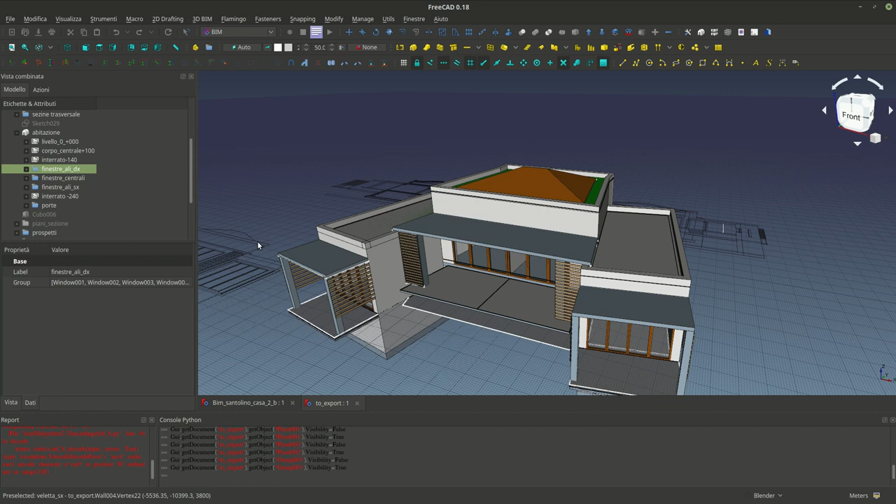To export the model, I have to choose the format in which I want to export. First of all, before the exporting process, I suggest to organize the model in some subcategories. So I have already put the building on 3 levels, 3 layers, and I can activate and deactivate these levels to confirm that the walls and other elements are part of them.

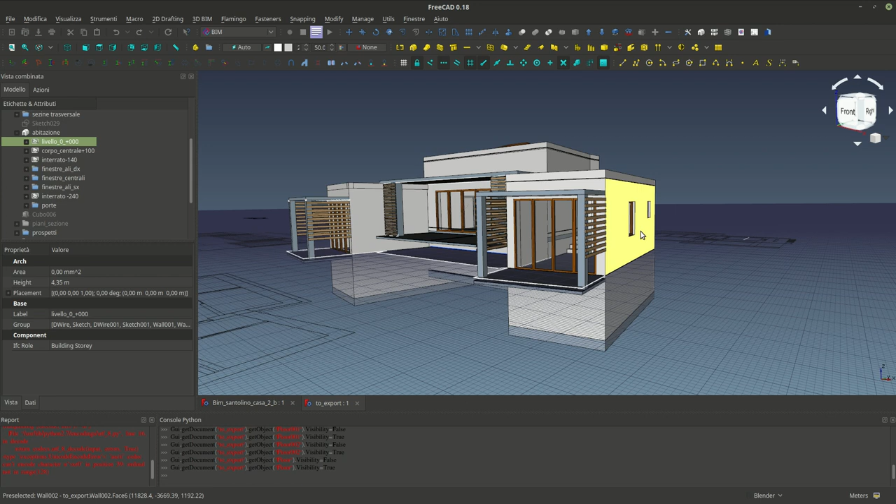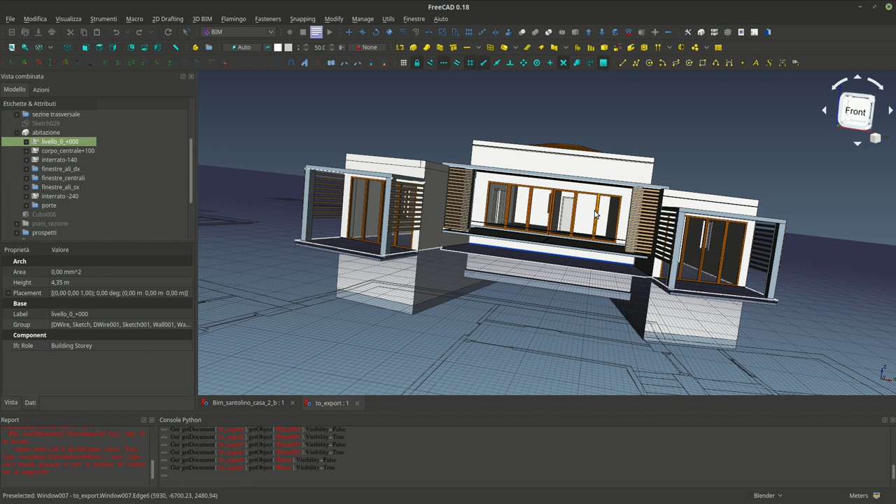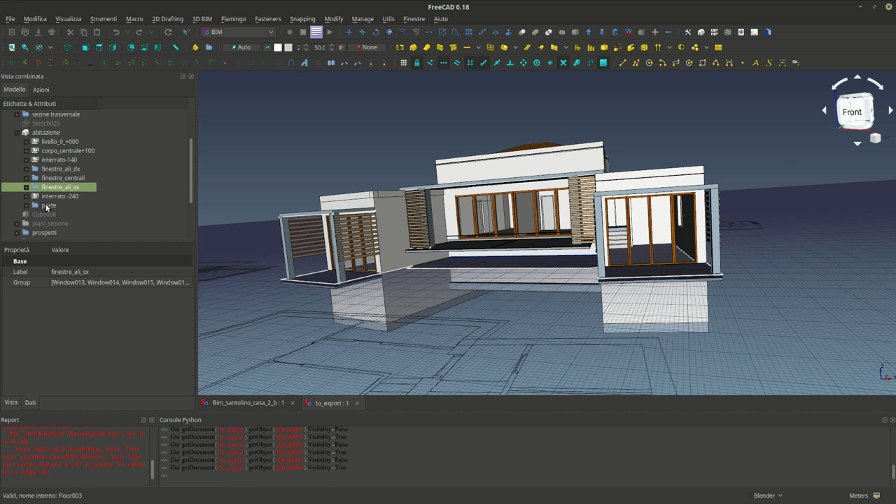And I think it's important to create folders that contain the windows, the doors, and other sub-elements of the building, because we often need particular treatment of these kinds of objects. So as you see, I've put the windows in the folders, and the same for the doors, the internal doors.

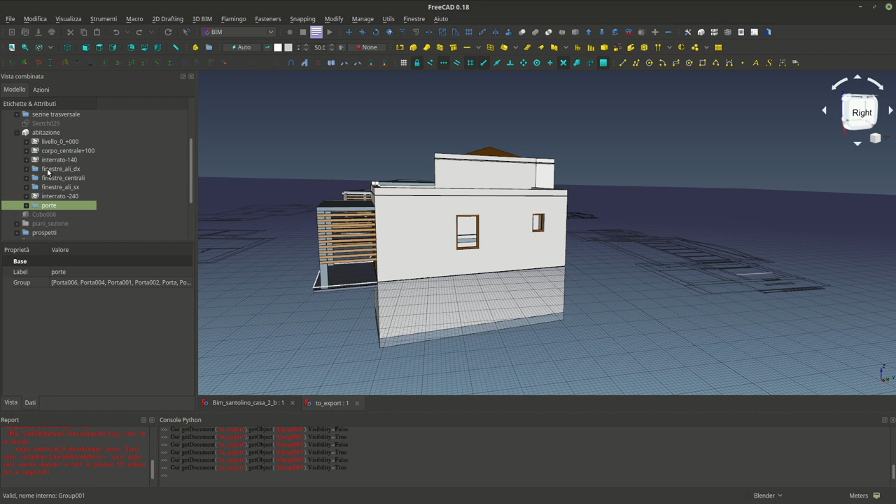This means that these elements, like windows and doors, are hosted by the wall, but at the same time contained by the specific folder. So I can manage more efficiently these objects that are small, so I can redefine the dimensions, attribute materials, and so on.

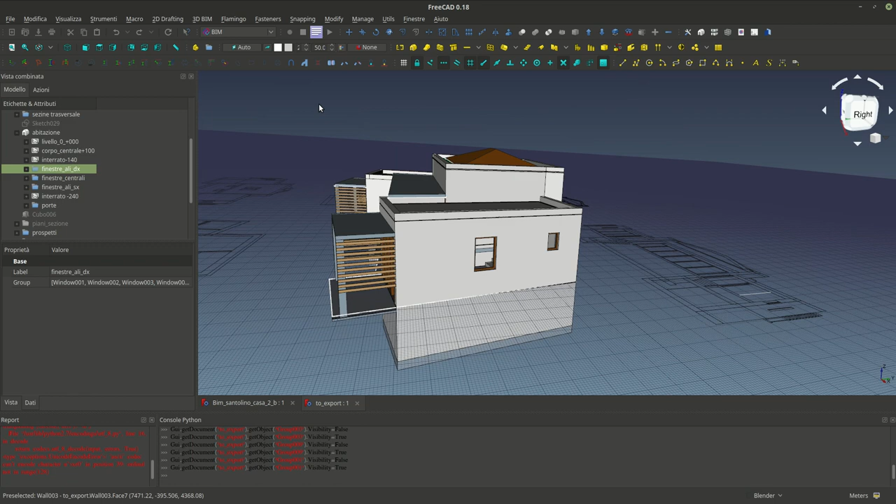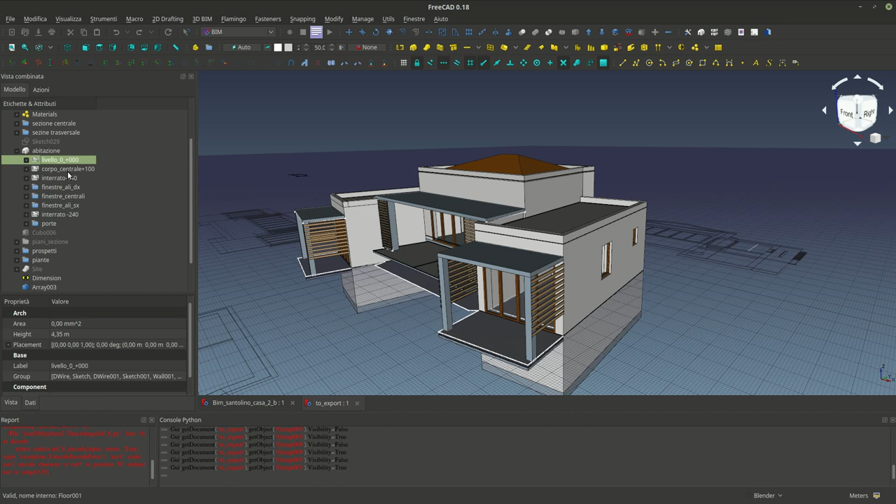So every macro folder or macro level appears in the tree view on the left panel, and I can hide or show them by pressing the space bar, like this. There's another macro box, the building object that contains all the subfolders. I can see all the objects are contained in the house, so I can hide and show them by pressing the spacebar.

Before I start to export the objects, I have to select what objects I want to export. By clicking in the tree view, I select all the layers and the building I want to export, and I'll export as OBJ. I suggest to export through the Alias Mesh OBJ format because it's the more stable way to export, and there's also another way that's growing very well to export the building, and it's the IFC format. But now, to speed the process, I use the OBJ format.

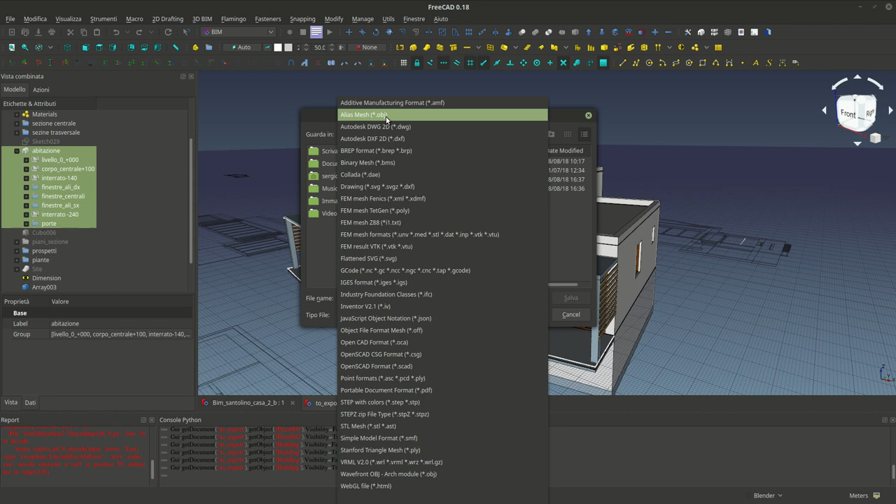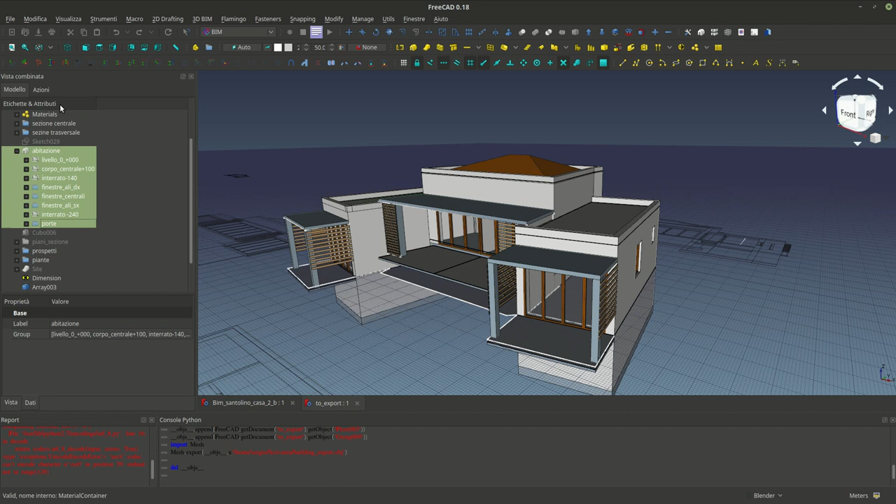IFC is still in development, and it's already solid, but there are some tricks to install IfcOpenShell, and if we don't need to handle an IFC model of our buildings, for now the OBJ file format is enough. So I choose Alias Mesh OBJ, name the file, export, and so the model is exported in this file. Then I have to open Blender 3D and try to import the file.

Okay. As you see, the building is very large. It's drawn in millimeters. So I have to scale it to meters, because Blender 3D uses meters as a standard unit, and FreeCAD uses millimeters as a standard. So I have to scale, press S key and type 0.001. So I have my model. It's in a wrong orientation. I have to rotate on the x-axis to align it in the correct way, with negative 90 degrees.

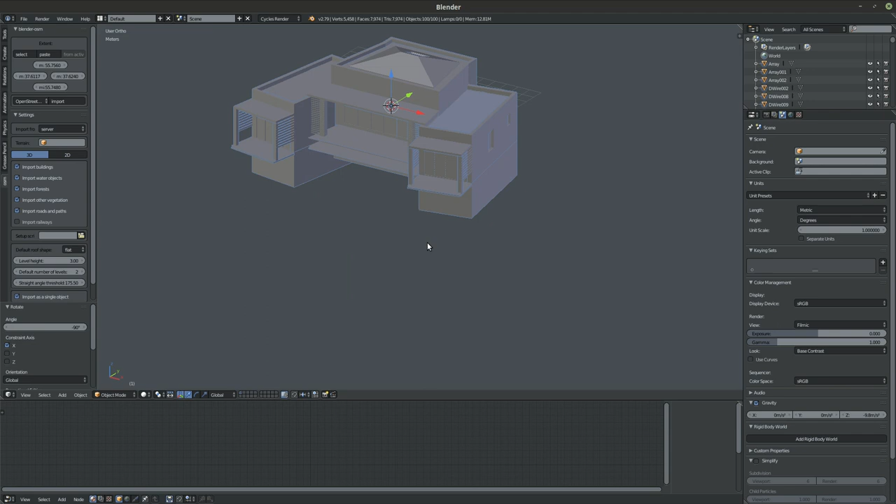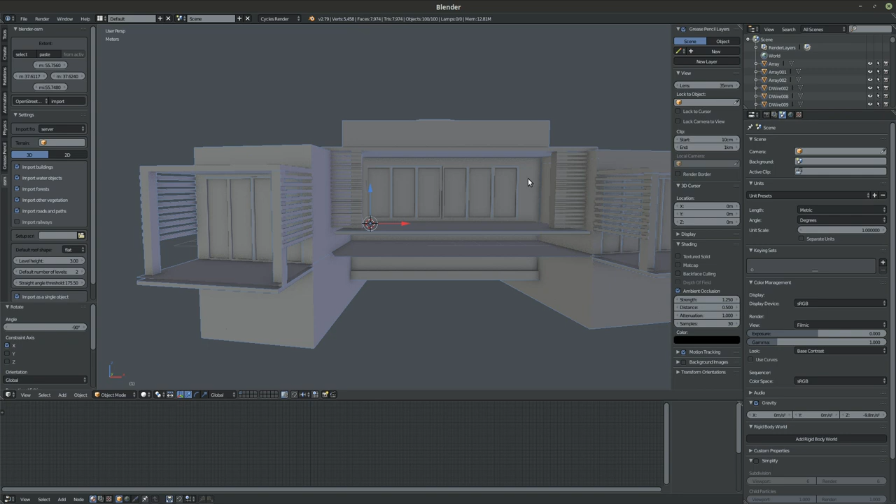Okay, and I have my model imported, and as you see, I can improve the visualization of the model by activating ambient occlusion, for example. As you see, the model is imported correctly, and I have some 2D elements that were contained in the folder that I've created in FreeCAD, like this plane, and I can delete the parts that I'm not interested in. So I suggest to save the Blender file.

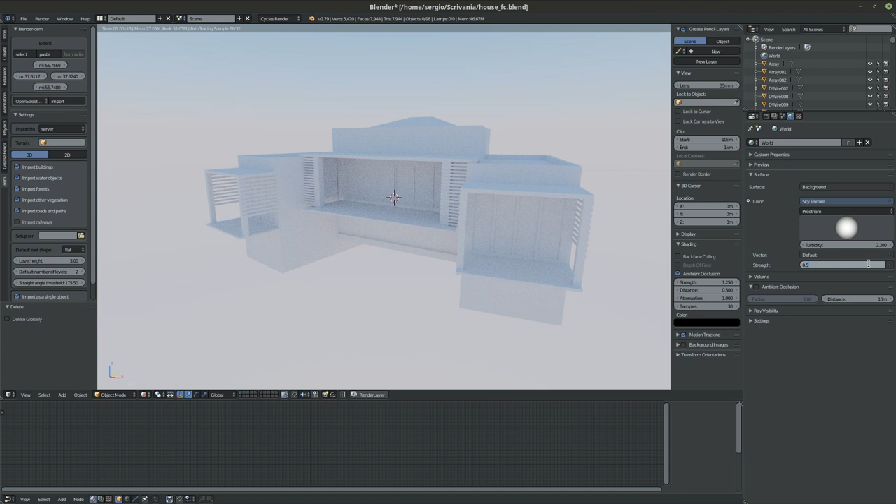And let's try a first render in Cycles with GPU compute. As you see, it's dark because there's no light source. I can use an environment node or a sky texture node. It's the internal physical sky generated by Blender 3D. And as you see, the model is right, it's correct.

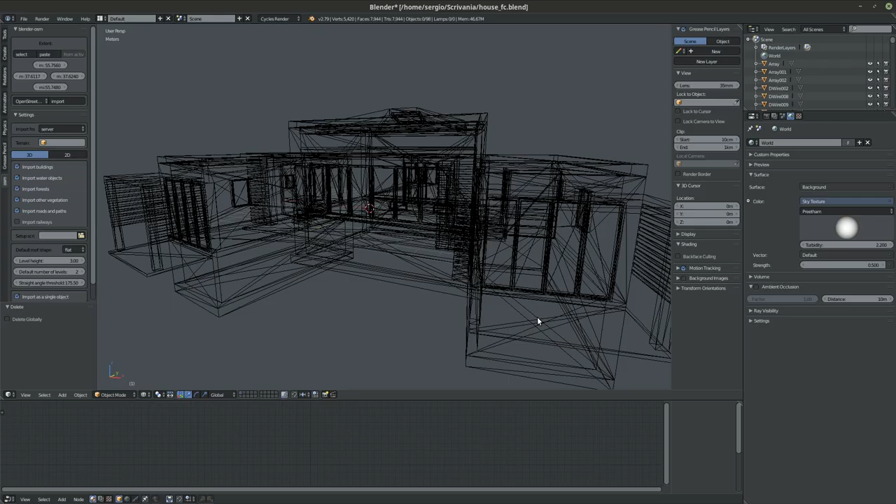This is the wireframe viewport. This is the solid, and as you see, all the structure that was imported from FreeCAD is triangulated. So if we have to make a nice render, in some cases we have to refine these triangles. For example, I have to refine this sub-level wall, with the remove tools, defining a quad face for a better visualization.

So I think it's all for now. In the next tutorial we will use this model to define a retopo model for energy simulation through VI-Suite.